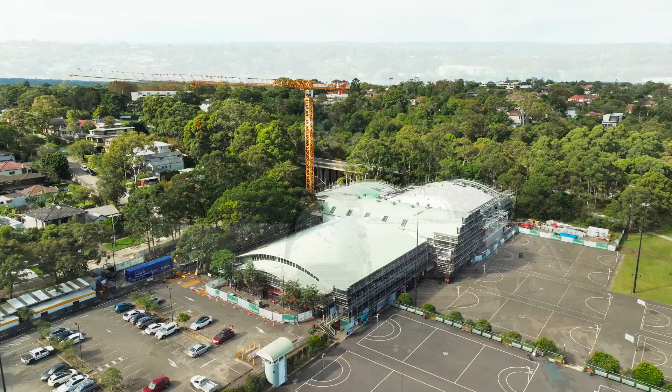The Willoughby Leisure Centre is a council-owned and operated facility located in Bicentennial Reserve in Willoughby. The centre incorporates swimming pools, two indoor sports courts and a gymnasium.

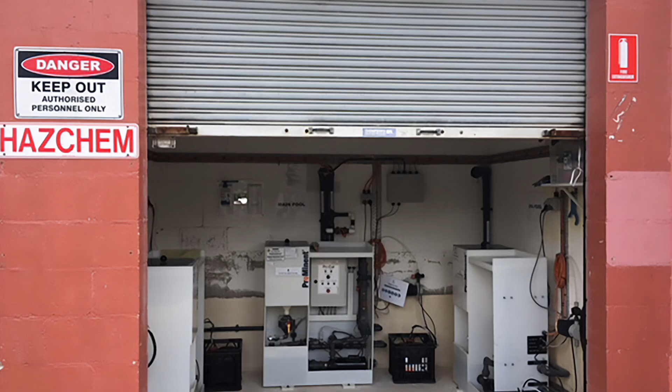In December 2022, Council commenced work on upgrading the centre, as the pool and building were showing significant signs of ageing, the mechanical plant was at the end of its life, and a newer, larger facility was required to meet the needs of a growing population.

The project initially commenced as an upgrade to the existing facility, utilising and enhancing much of the existing building structure, and importantly relying on the in-ground structural piers that support the building.

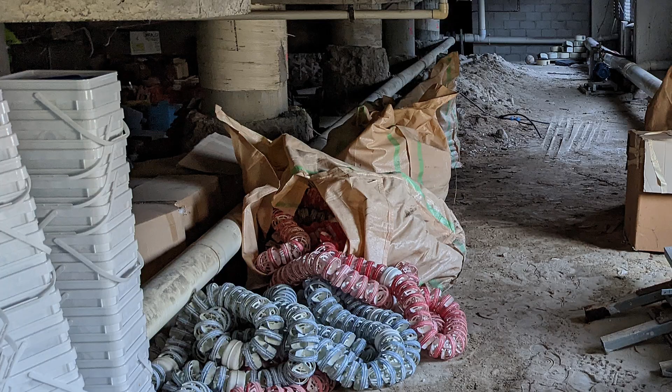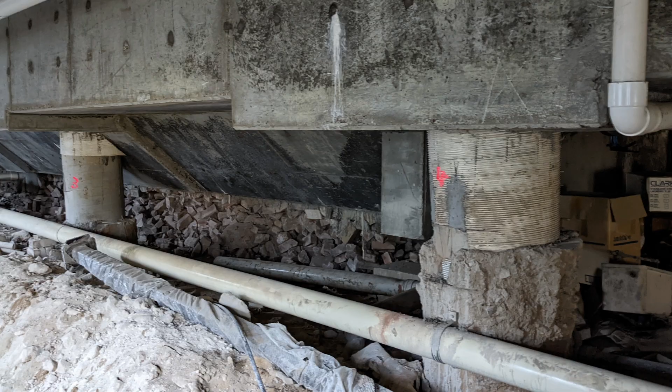Prior to construction, significant in-ground testing was undertaken on the site, along with tests to determine the structural adequacy of the building's substructure. However, this testing was limited in scope, as many of the structural piers were underneath the existing pools and not accessible. Following demolition of the pools, it was then possible to test the structural adequacy of the building's substructure, which was previously hidden below the building.

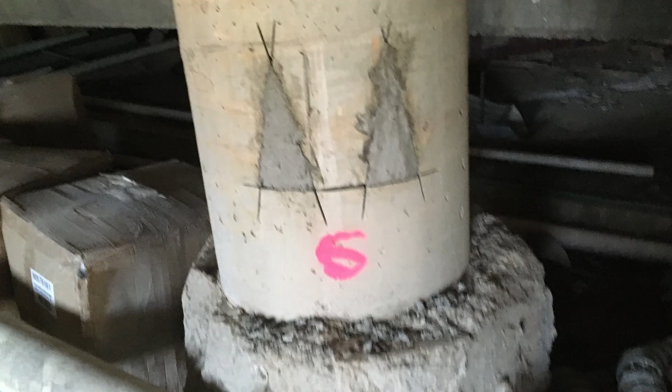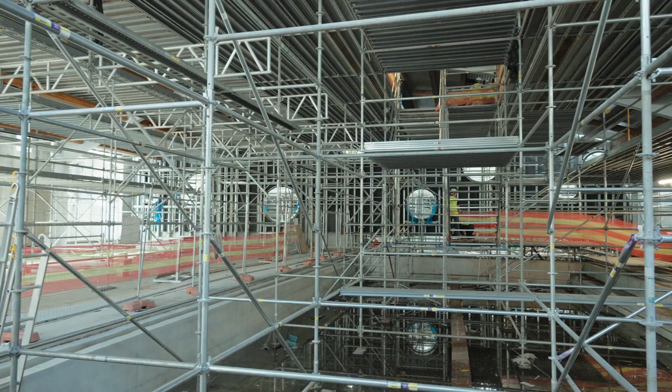Once the existing piers could be tested, it became evident the entire underlying structure would need to be replaced, as the engineers were not satisfied with the bearing capacity of the existing piers, as they did not extend sufficiently into the bedrock below, or meet seismic standards in the event of an earthquake, given that it's located on a former rubbish tip. At this point, the project changed from a refurbishment project to the construction of an entirely new building.

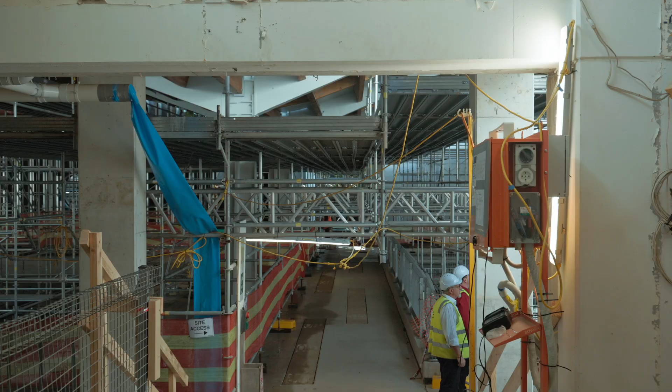This significant change has resulted in delays of 20 months and an increase from the original revised budget to a forecast cost to completion of $65 million. Whilst the cost increase is significant, it's unavoidable given the level of structural work required.

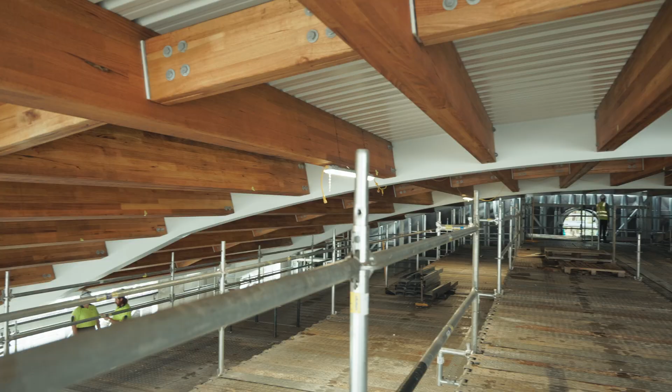The increased cost will be funded from developer contributions and council reserves, which have been set aside to maintain and build assets. Council is not considering any changes to business or residential rates as a result of this project, nor was this a factor in the consideration of last year's special rate variation.

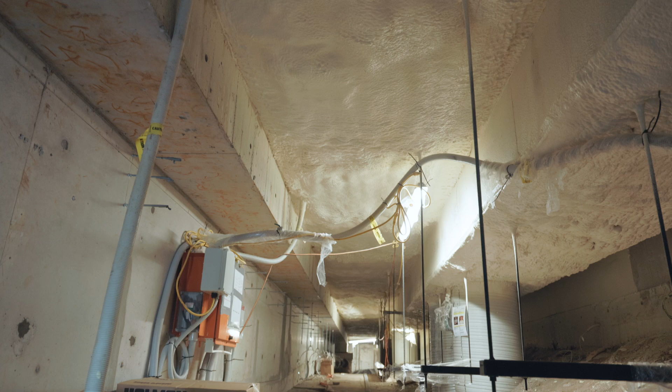The project would see the existing two pools replaced with five new water bodies: a 25-metre lap pool, a new 20-metre learn-to-swim pool, a 20-metre program pool, and a children's play pool area with water features and a large spa.

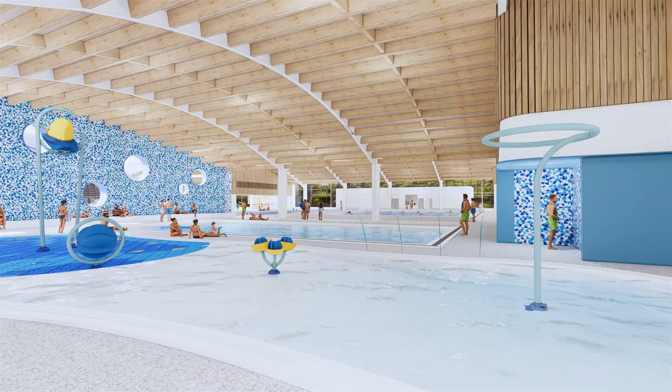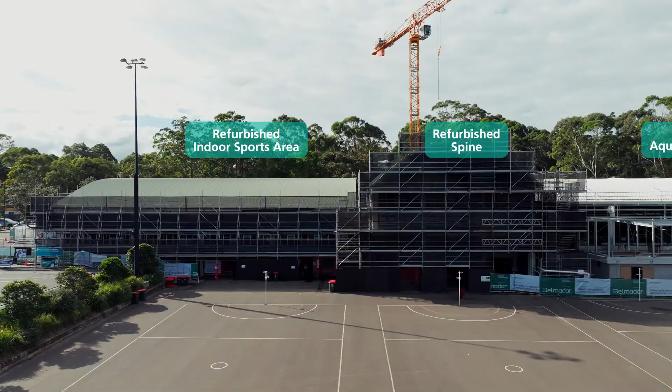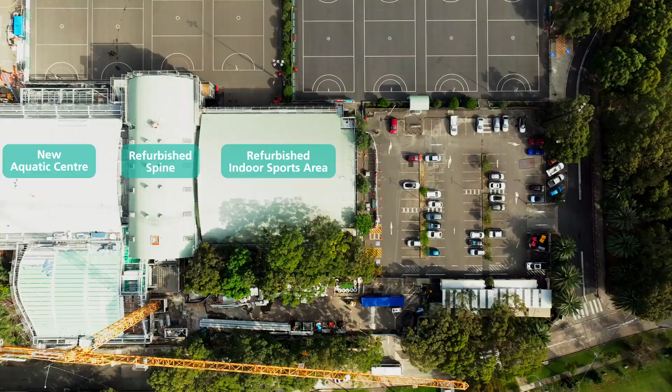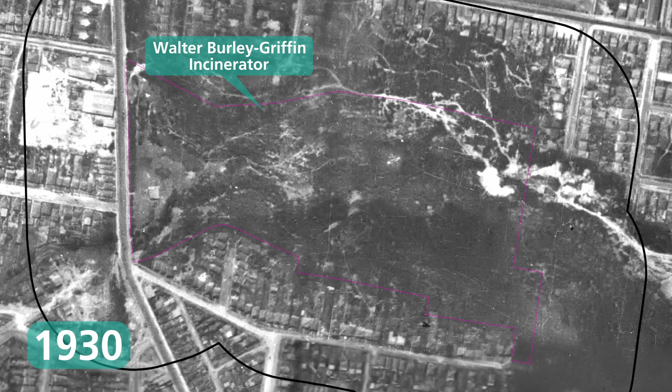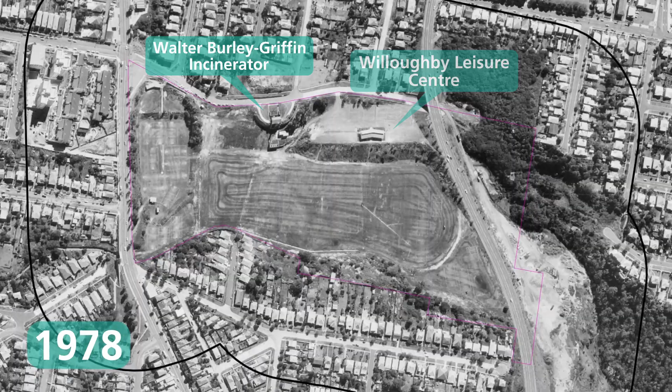Bicentennial Reserve opened in 1988 and is located on top of a former rubbish tip which operated from the 1930s through to 1985. Prior to its use as a rubbish tip, the topography of the land was characterised by a deep gully that was home to Flat Rock Creek, which originates in Artarmon and feeds into Tunks Park and Sydney Harbour.

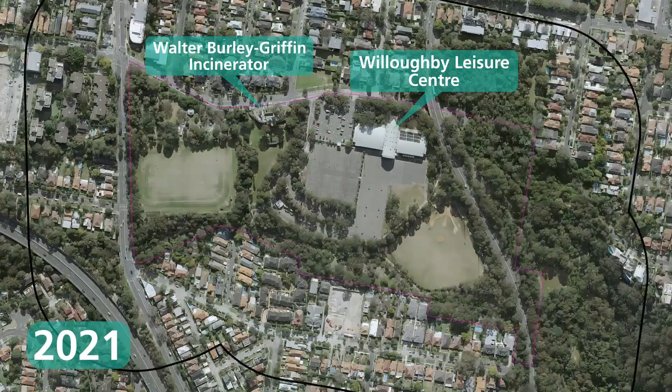Whilst the leisure centre looks like it's sitting at ground level, in practice it's floating on piers above the gully below. When the rubbish tip was proposed in the 1920s, a large concrete culvert was built to divert Flat Rock Creek through the gully and at the same time protect the water quality from the rubbish that was to be filled above.

Over the coming decades, Flat Rock Gully was filled with waste, and in many parts of the reserve, the new ground level is up to 40 metres above its natural height. When the Gore Hill Freeway was extended, the excavated sandstone was used as a capping layer of the former garbage tip site to create Bicentennial Reserve.

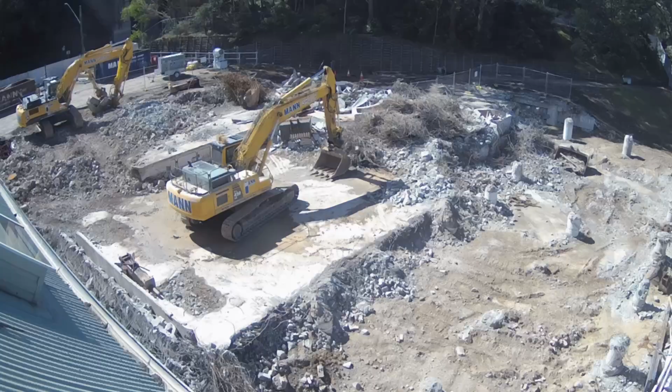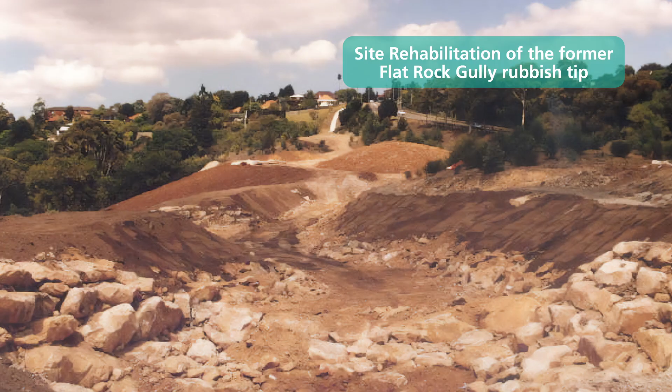Given the shape of the gully and the rubbish and sandstone capping layer, the original leisure centre was constructed upon piers to support the building. At some points, the building is elevated up to 15 metres above the existing ground level, with these piers providing vital support to the structure.

The project's original scope included removal of the primary swimming pool, removal of the existing program and children's pool, along with the removal of the concourse deck area.

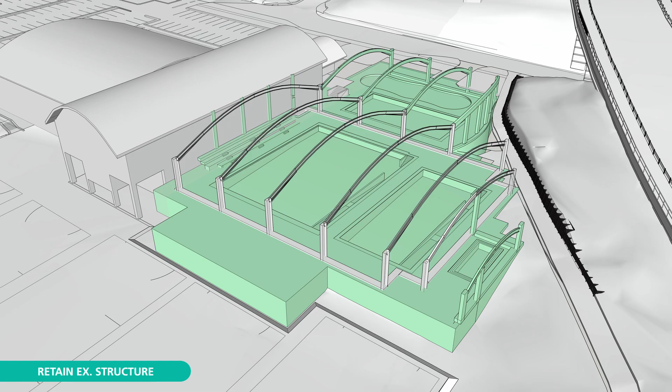The light green colour shows the new pools that were going to be built within and on top of the existing structure. The building elements in red show the beams and columns that were going to be reused. The structural piers below the building, marked in grey, were going to be reused to support the new structure.

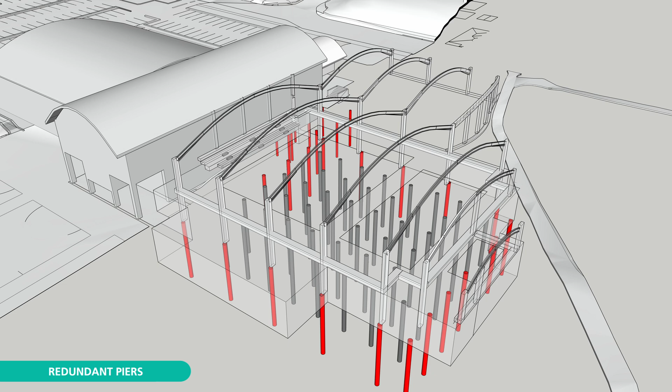However, when they were inspected by engineers who were able to take core samples, it was determined that they were not adequate to support the building and would need to be replaced and supplemented with new piers in blue.

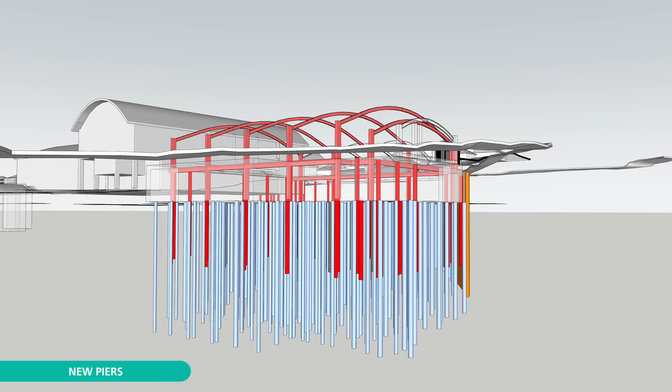Problems were discovered around the quality of construction of the original substructure back in the 1980s, and the engineers re-rated the ground quality for seismic activity risk, which required a new modern substructure. The new piers in blue show the extent of work that was required to provide the necessary support to the structure and manage earthquake risk.

The piers marked in orange show the extent of underpinning required to support Flat Rock Drive, which is to the east of the new facility and sits upon an existing embankment.

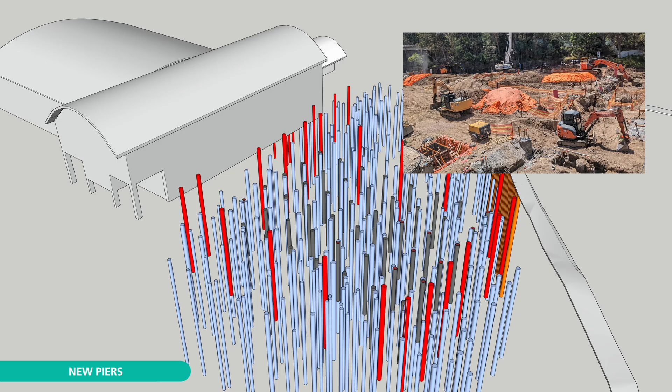This work required an extensive excavation, at which point work was slowed down by the discovery of asbestos within the site's soil. Whilst the asbestos was not significant in quantity, it was widespread, dramatically slowing progress as the site required strict management in accordance with EPA guidelines.

Whilst Council was aware of the risk of asbestos in the former landfill site, the volume of unplanned excavation required removal of soil in quantities not expected.

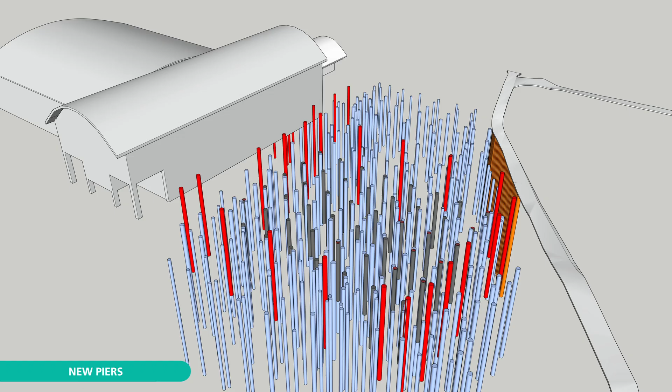With the new substructure in place, the new pool decks could be formed, the new structure erected, and the new roof installed. The project also extends beyond just the aquatic facility, with the roof being replaced on the main spine of the building, over the gymnasium, as well as the sports hall.

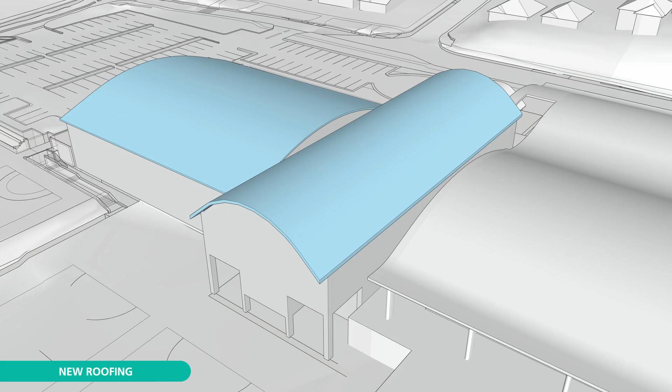The indoor courts will also be resurfaced, and the cladding of these two buildings will also be replaced.

Throughout the design and construction of the new leisure centre, environmentally sustainable features have been incorporated, which will reduce future running costs and the building's carbon footprint.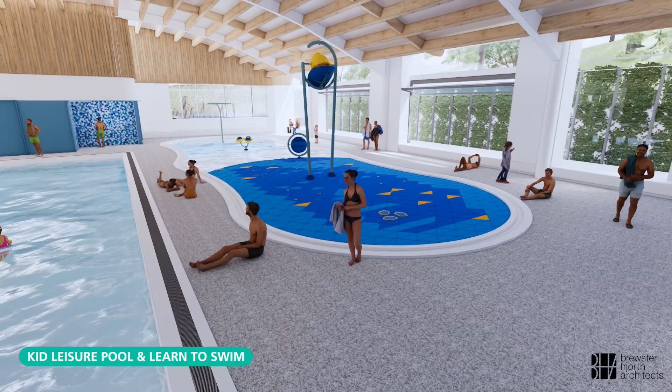The new pool has been designed to be environmentally sustainable, including extensive efficiency improvements, electric vehicle charging facilities, and the installation of 2 rooftop solar photovoltaic systems totaling 500 kilowatts, which is enough to power over 400 houses.

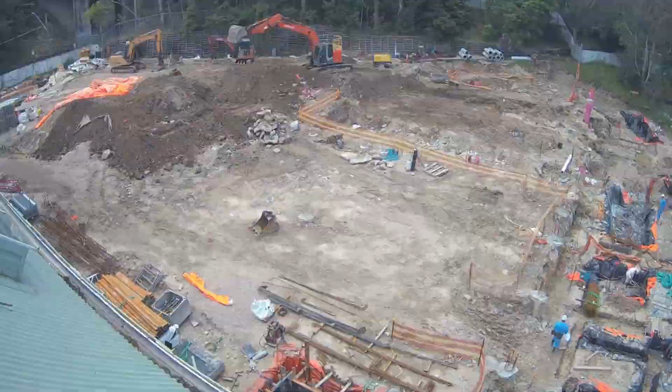The new pools will be heated with renewable electricity, and the previous gas-fired heating system has been decommissioned. This will reduce gas used by Council by 90% and save around 800 tonnes of greenhouse gases and save $100,000 annually.

While these challenging in-ground conditions have been unanticipated, we've been well prepared for such eventualities, with funding capacity made available in Council's long-term financial plan to ensure that there's no compromise on the quality of the new Willoughby Leisure Centre.

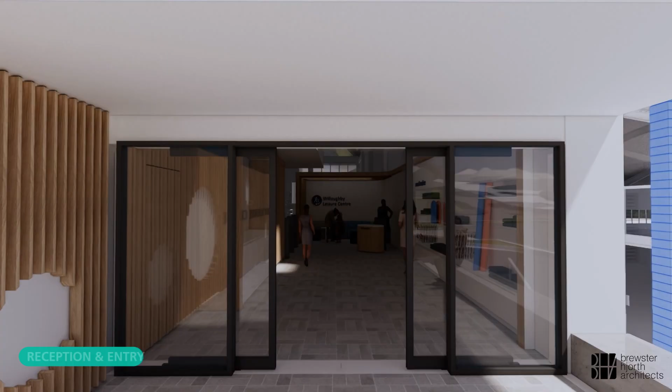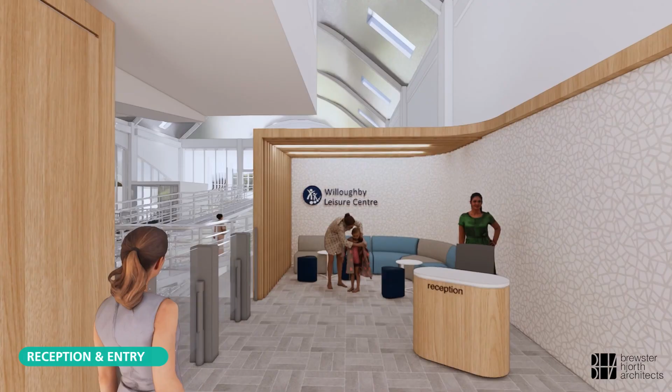In addition to the funds received by Council under a New South Wales Office of Sport Multi-Sport Community Facility Fund, the incremental project cost is funded using a combination of developer contributions and existing internal reserves, meaning there's no need for us to source additional funding from rates revenue, nor does Council have any need for a change to residential or business rates as a result.

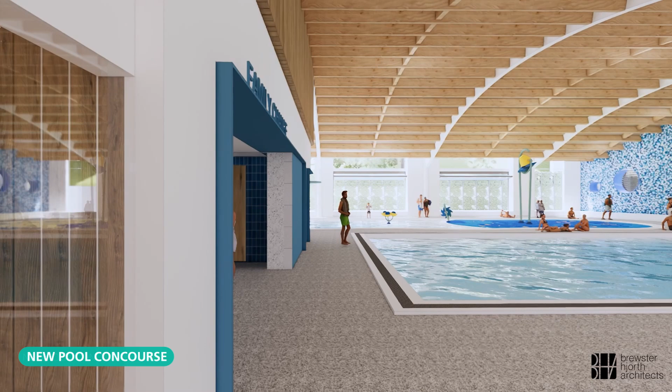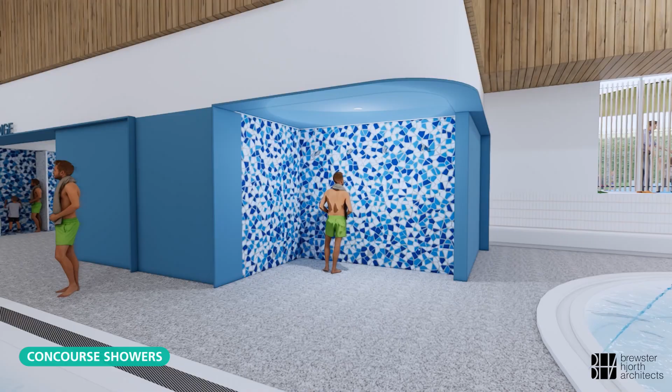Council is currently planning to open the new facility in February 2026, in time for the first term of swimming lessons. This date is still subject to the normal construction risks, and Council will keep the community informed on project progress, with monthly updates posted to our website, social media, and other channels.

We'd like to thank our community for your patience as we continue to work hard to deliver for you the revitalised state-of-the-art Willoughby Leisure Centre, a game changer for local fitness and recreation.